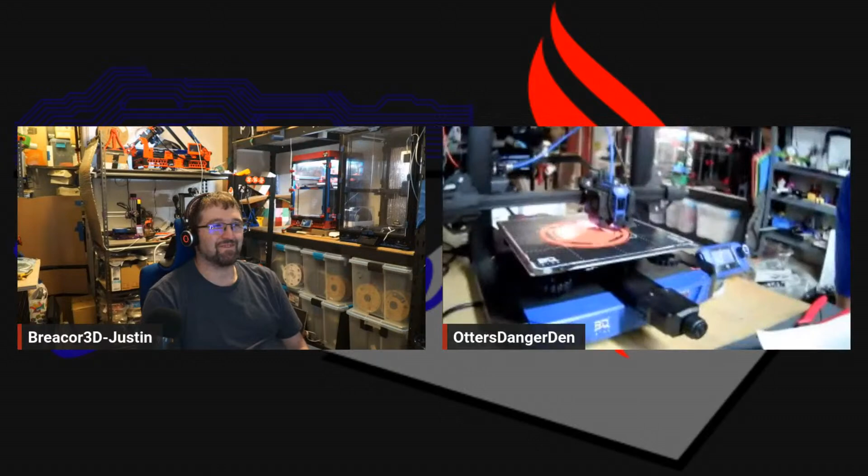Do you, whenever you go live, does it automatically share it with Twitch? Yes. Okay, because instantly when you went live, it came up on my Twitch feed. Yep, Twitch does not let me pre-plan like YouTube does. Oh okay, live with Twitch, you're just live. That's it.

So how's everyone doing this week? Tired, hot, and I feel like I've been robbed. Anybody else? Yeah, I'm more feeling like I'm robbed of time, but that's more than that.

What sort of robbed? That's kind of a worrying thing to say. Well, the last 2 days, Sunday night or Monday morning, whatever, 12 o'clock midnight, I was sound asleep, and I started getting phone calls from the fraud department at one of my primary banks.

Oh geez, uh-oh. Yeah, I told you about this, Justin, didn't I? I think so. So somebody started hitting my account with these 90-cent charges, less than a dollar. By the time I actually woke up in the morning, because I'm not answering anything at 12:30 at night, it's just not going to happen. One, I'm not awake enough to have a coherent conversation, and two, if somebody's trying to scam me at 12:30, they're probably going to get away with it. So I just ignore everything. So I waited till my bank, where this fraud department alert was coming from, which doesn't open up till 8:30 in the morning.

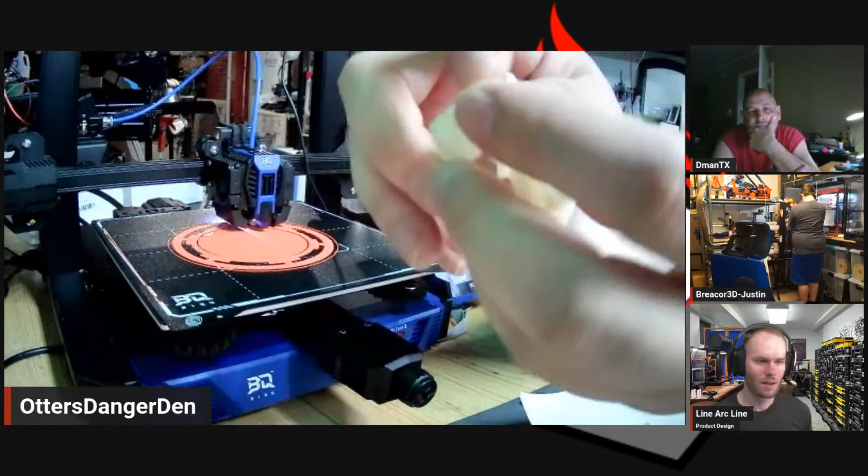Voron. It's basically kind of like the hinge on a bathroom stall door - you open it up and it'll stay open, and when you close it, it stays shut. That's the idea. It just kind of does that with the extra weight on it. You close it and it pretty much stays closed, and it's a little aggressive if you push down on the door. That's how far forward the ramp is, but that's what you need to keep it closed.

That's the idea of having these set states for the door, either fully open or fully closed. That's attractive, what a good idea. And it doesn't go fully open, so if you have machines next to it. When it's fully open, does it lock in? Yeah, it does the same thing - it kind of holds itself open.

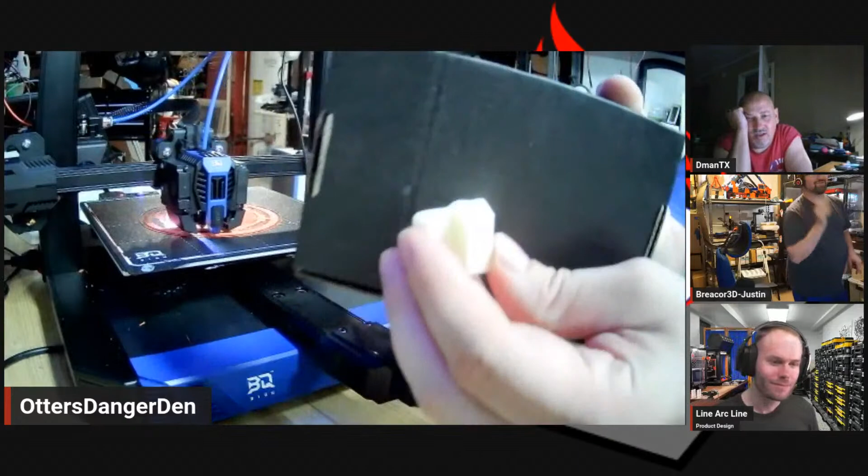So is it done with a notch or is it just done with flat spots? I have the worst filament here for trying to show this off, and I have the whitest hands. Hold on, let me find something a little darker. There you go, Justin, thank you. That was not me, that's my producer. Oh, thank you producer, that's what we call him.

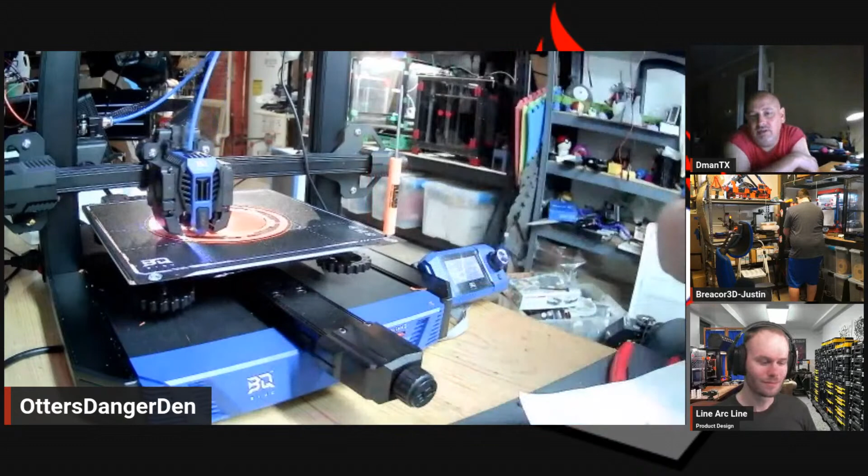Oh okay, I see how it works. Yeah, so I guess you could probably see it a little better on that. It's kind of similar. There you go, okay. Did you design this? Yeah. Post that, I want to print it and check it out. Yeah, I need to do a little more testing before I fully release it, because this was my last prototype.

It was using the 3M adhesive, and it kept falling off when it heated up. So I am putting holes in it instead. Right on, yeah.

It's a good look. Thanks, Will, for bringing his hinge back up. I felt kind of bad, I kind of took over there. Nah, I just get really excited about hinges. You know me.

Yeah, that's something sick about that. I'm sure. Dude, how do you have such a clean fake background? It kills me every time you do this. I have an admission to make to all of our loyal viewers - I am a liar, but a responsible liar. And I'm going to reveal my secret right now.

So this back here is my workshop. It is in reality my actual workshop, and it is not behind me - it is actually in front of me, because my computer is in a different room.

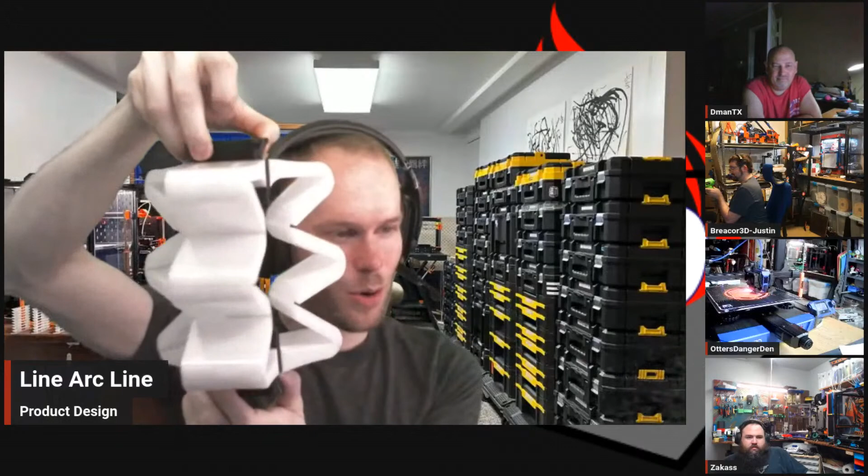Speaking of hinges though, I finished up this fun little flexure mechanism. This is a modification of my bookbind flexure, but in a three-sided orientation, so that it limits its linear motion in one axis. Yeah, I was about to say, it doesn't look like you can get any kind of rotational or translational, you're just going...

You can get a little bit, and that was my discovery from this. You do have some odd motion. Well, I was almost thinking of maybe a three-dimensional mouse. You've got all six axes. The up-down motion, capitalize on that.

Now what did you print this out of? The flexible portions are out of PETG because PLA has in the past been very unreliable for this aspect, but the handles are just straight PLA. I have a bunch of this clear PETG, which, if you can see, is quite a delight to see the gyroid infill through there. It's been neat, and I have a feeling that if I extend these flexure mechanisms outwards, I'll be able to limit the overall motion even more.

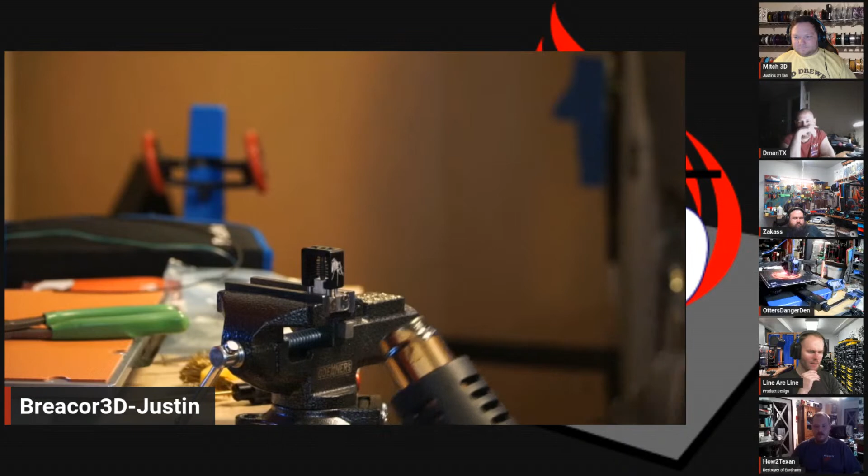I recently got the chance to try nylon filament for a cold pull, and boy, that stuff pulls beautifully. I didn't know, and now I just have a few snips of nylon just at the ready.

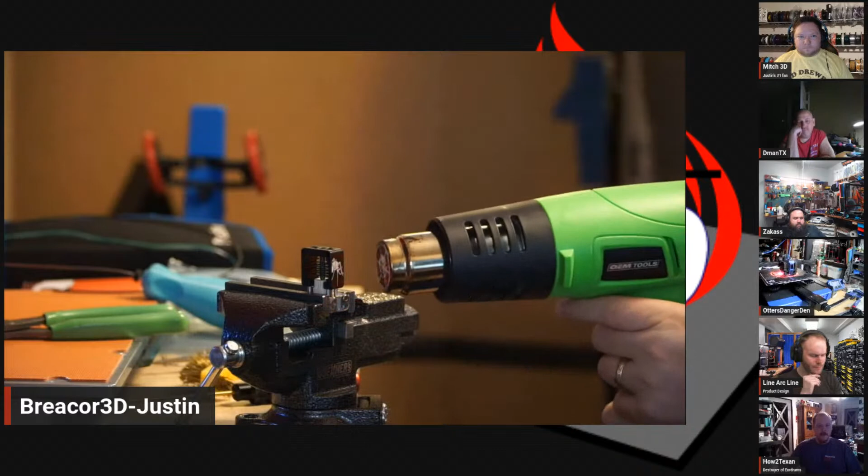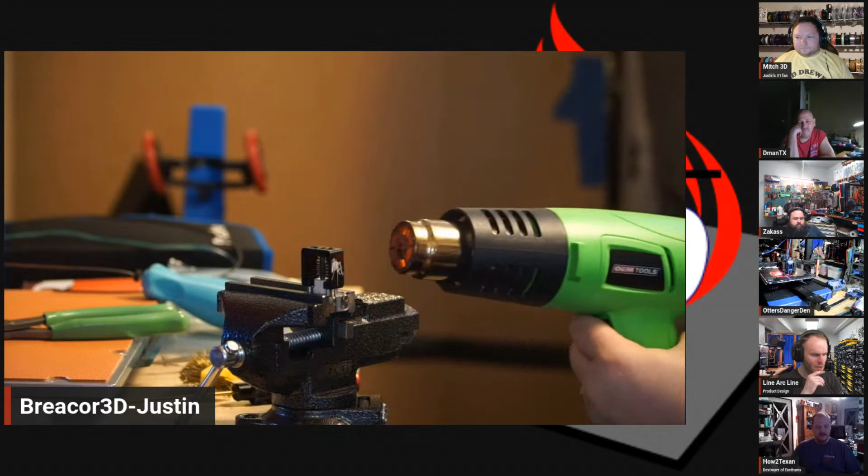So what are we doing? Cleaning out this mosquito hot end, evidently, with cleaning filament, like specialized filament made for cleaning out a hot end. I've heard of that, but honestly didn't bother to look into it at all. What's supposed to make it so special?

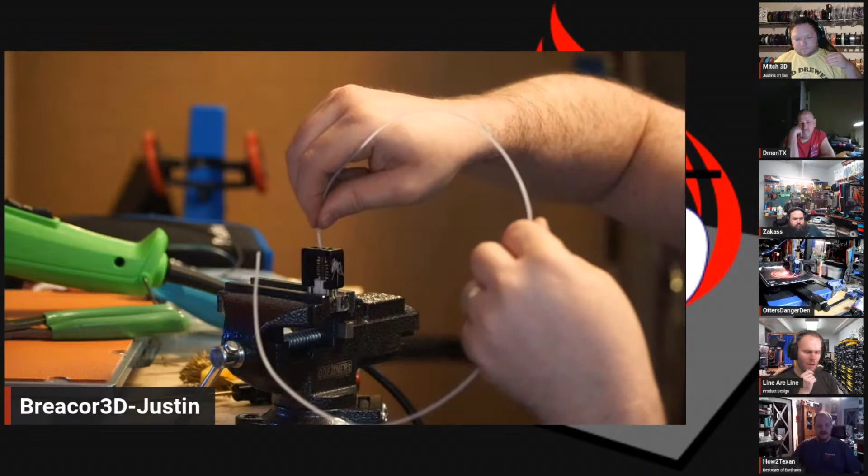That's something I want to ask Justin about once he's finished with the loud heat gun. I don't know specifically, but I've been using it for years and never had an issue with it. So what's it supposed to be doing? It's meant to clean out the inside of the hot end all the way up to the heat break, especially if you have something stuck to the sides of your heat break. It's meant to help clean that out too.

Basically, you heat up the entire hot end and melt it to the edges on the inside, let it cool a bit, shove this through, and it cleans it out. So what, the cleaning filament doesn't melt or something? It does, it still melts. I gotta mute, hold on.

Mic check. You forgot to mute? We can hear you, Mitch. Oh crap, sorry, okay, so sorry, this has been stupid. So I have these Logitech headphones I've had for like 6, 7, 8 years, and I think I played with the cable so much that I messed up the wires or something. They're really thin gauge.

I tried to get the Bluetooth on my AirPods to work, but that didn't work. Then I plugged in my Audio Technica headphones with the mic, but the mic on the headphone jack doesn't accept it as a mic. So I'm using the camera microphone as my headset, which is stupid. Downstairs, my setup has a snowball microphone that works way better, but my desk is a mess and I don't have room for it.

So, your desk is a mess? Oh my goodness. I'd show you mine, but I'm pretty sure I've got confidential information strewn on it. I'd show you mine, but that's why I have a fake background. Yeah, that's the way to go. Oh, yours looks so real.

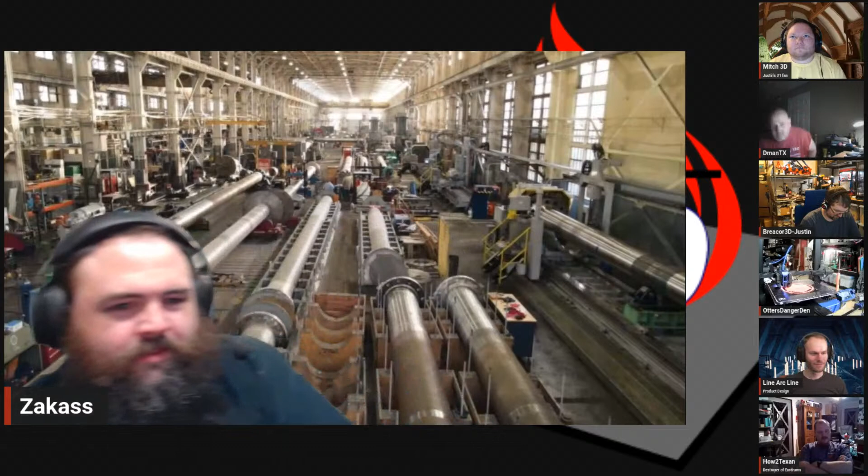Here we go, oh here's a cool picture. Maybe. So this is - I never actually went to this facility. The last place I worked, this was their second shop in South Carolina.

You see that? Lovely. Yeah, I do. These are shafts that go in aircraft carriers and submarines.

Nice, that's incredible. What's this large black panel in the lower left? Maybe lower right for you. It looks like just a welding screen. Oh cool. So on the right, you see the shaft that's the furthest on the right.

That's a CNC lathe that's got like, probably, 150 foot, 200 foot long bed, with like a 72-inch chuck. Hey Zach, is all that out of 4140?

I'm not sure what material it is. Go through some carbide there. Probably, yeah. Man, I was watching this video yesterday about removing a broken tap out of this $1 million part. It's a nightmare for sure.

And the size of this part, I couldn't imagine a lathe that this part would fit onto. And now I've seen the lathe that part probably fit on. Wow, a little culture shock for you. Yeah, that's funny. There were some huge machines that company had, like ridiculous.

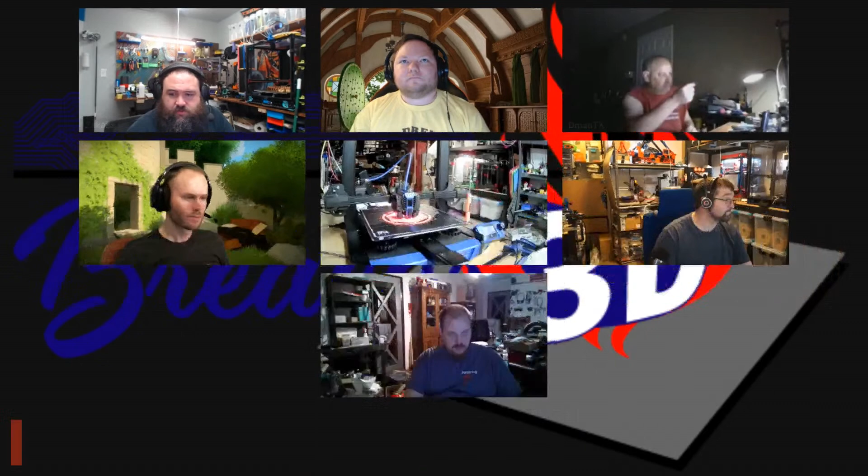Yeah, there's also a former race car company, Relativity Space. No, not Rocket Lab, Relativity Space. Their rocket by weight was 85% 3D printed.

There's a company doing 3D printing with metal - a former NASCAR team, I think it's Hendrick. There's a NYC CNC video where they did a tour of their facility, and that was pretty neat to see, them actually doing production parts and stuff.

I just need a small investment of $1 million and I'll start one. Pocket change, right? Should be easy. I'll start a mobile app to get YouTubers to sponsor YouTubers, get a bunch of people addicted to it. Or just start a YouTube channel, get to a million subscribers, convince every one of them to give you just $1, and you're in business. Easy, right? Or do a Kickstarter - I'm sure there's enough crazy people out there that would back it.

Oh, outstanding, look at that. Nice, Zach. Did you wait for us to pop that off the board? Just finished it. Congrats.

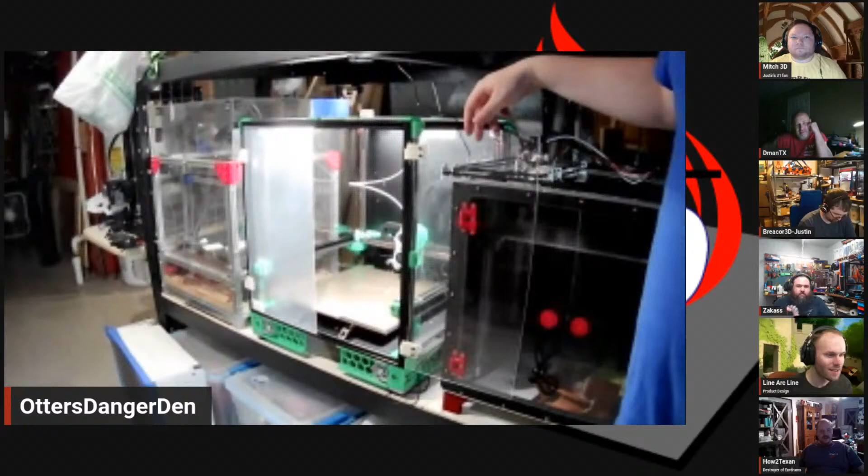So I don't know if you can see this - the hinges, and they stay open. I've had one of these, it was Justin that was building the Trident. I think everybody has a 2.4 at some point. You also don't have the magnets to hold it closed, it's entirely the hinges. That's very interesting - thanks for showing us that. I still gotta print the magnet part for it and put it on there, that'll just be that extra thing. But yeah, that's great.

I have a question about your camera angle right now - it looks like you have one of those screwdrivers, like the promotional tool truck ones. Is that just stuck on magnetically? Yeah, there's a magnet on the end. Oh, that's clever. Yeah, that's from KB3D. I've got a couple of those around. I do too.

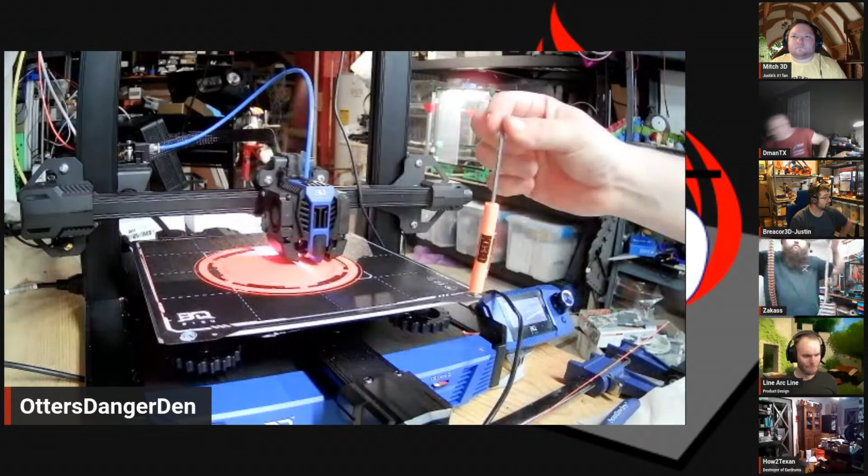It's a 2.5 millimeter hex drive, super useful. I use these screwdrivers so much - this is like the perfect size for the control board screws and everything.

Oh my gosh, that's a very long snake. Keep in mind I'm 6'3". It's wonderful that it holds up under its own weight - this is about 7 foot long. What was that printed on? A 2.4 350, I need to print one of those. It's tricolor silk. Oh wow, very nice.

I think I'm gonna build around with that 350 tricolor. I'll print you the parts, Mitch. The V0 will take a decade to print - that would be funny though. Well, I have two of them now, actually. It would take me half the time, like 5 years. Or you just talk to me, the biggest issue is the $1,000 of parts that I gotta buy.

Yeah, just do a Trident kit. Or you can do a 350 Trident now on AliExpress. Is that not recommended? LDO doesn't offer one yet, so - I meant if I self-source, that's what I'm saying. Self-sourcing is going to run you $2,000 by the time you're done. Is it just Siboor, or because of Amazon parts? In general, when you don't get them in a kit, they're more expensive. Siboor has a 350 local maker kit, it's $1,100 I think. Yeah, that's why I was looking at it. What's funny is, he said LDO doesn't have the 350, well Siboor doesn't have the 250. I think it's a conspiracy.

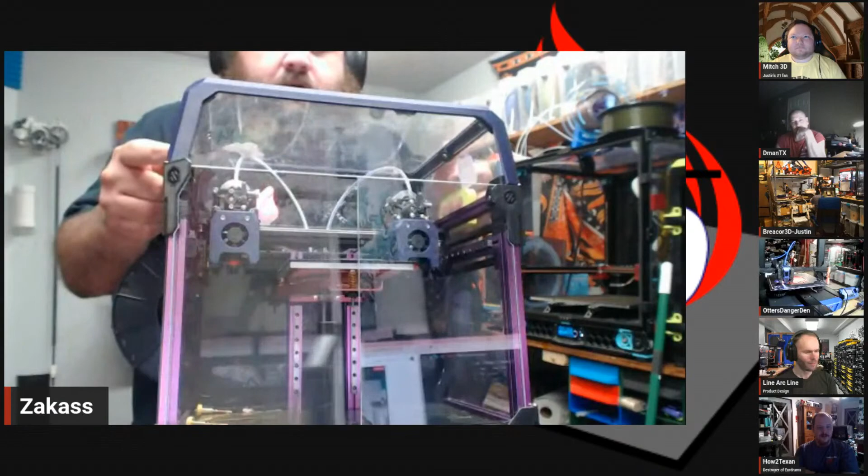You were thinking about selling that? Yeah, how much you want for it? I don't know, I think that's at least 1,000. I can't imagine, that's a lot of work. After the stream, that's pretty cool. Well, if you're interested, make me an offer.

Revos in both heads. Oh wow, they come with a full set of Revo nozzles for both heads. Wow, what a treat, that'd be a nice machine for that size.

So is the top hat one piece? The extended top hat instead of the normal - the original designers glued it together, I just put everything into one, so it's a one-piece top hat. That's pretty slick, so I saw the dual heads in there. I haven't come across that design before, I think I'm behind most of the folks here. Does it have a tool switcher, or are they both independently driven?

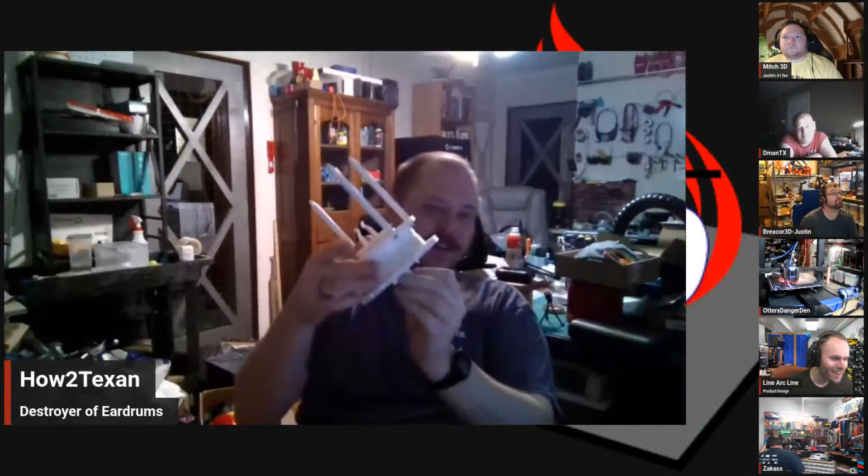I saw How2Texan showing something off that I'm very curious about. What is this? Guess what I'm making. Let me guess, because this seems like a very difficult thing to guess. It looks like a cross between some sort of generator and a birthday cake.

So what I'm holding in my hand is part of a build with over 100 printed parts, and you're only looking at about seven of them. I like Kit Skyfire's guess, which is a complicated egg beater.

It's a sock knitting machine, isn't it? Local maker may have gotten it. What did he guess? A sock knitter. I can definitely see where you might get that, but no, it's not that either.

I'll give you a hint to help narrow down the category a little. It has to deal with mathematics. Ooh, okay, is it an Antikythera mechanism? No. A little more recent than that. Enigma machine?

Is it a physical calculator? You're building one? That's fantastic, those are so incredible. Someone released a model for it. I knew what he was building so I couldn't just spit it out, but I was happy to hear all the guesses. They were insane.

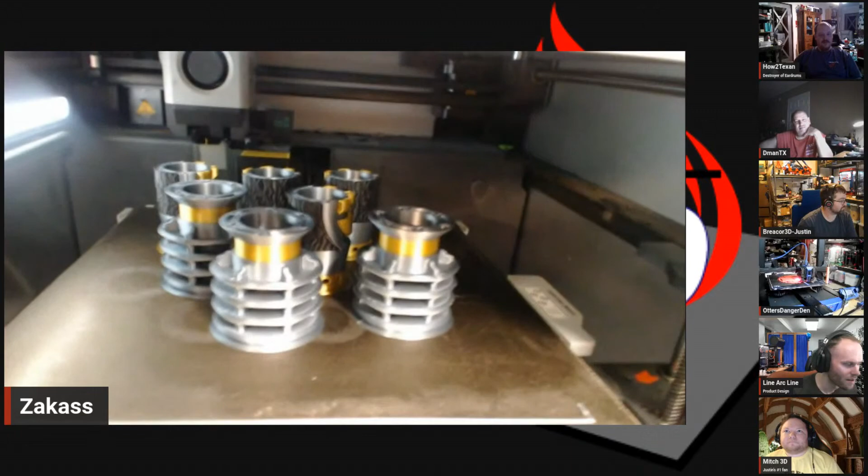Is Zakass printing something similar? No, I got on 3D Printing World's Patreon as well. These are his replaceable blade lightsabers. Wow, so pretty, that's clutch.

Leia and Mace Windu were the two designs there, and I'll show you the color I've got for the Mace Windu lightsaber. It's Polymaker Metallic Magenta. Oh, it's gonna look cool.

Hey, How2Texan, while he's showing us this filament, would you mind bringing up the page that shows the completed project for the calculator? I'd be curious to see that. I could open it if you have it, I keep having to recognize it, but I can reference it.

Guys, I'm gonna bounce out, man. I gotta get out to the garden, I got stuff to do, but I'm gonna see you guys later.

Mitch, are you there? I haven't heard you actually speak yet. You good to go? Yeah, okay, that works too.

Work has been really bad lately, so I haven't streamed or done any projects or anything. I'm just playing Zelda right now. It's better now, but I'm always looking for work. St. Louis isn't really the best area for any of that.

But I'm not moving. Come out to Virginia. Yeah, I'll have to ask my mom. I think it's hotter and more humid there. Hey, I'm with you there, not a fan.

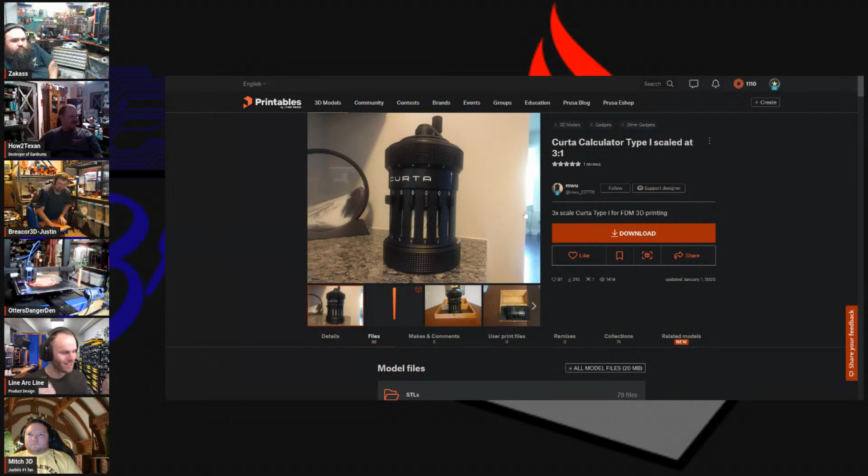Am I going to see you at RMRRF? You are, I'm gonna try and bring my work to a better place so I can present a good representation of my design. Is anybody going to East Coast? I might, I don't know yet. I want to, but I haven't made my decision. Gotta drive. East Coast is easy for me, it's like 2.5 to 5 hours depending on traffic. I would like to, but I just can't. Yeah, you can't, that's for sure.

When is it again, is it later this year? September 30th and October 1st. Okay, if you do decide you want to go Will, we can talk about travel. Maybe, probably not. I gotta - oh boy, my life is in a different place right now.

Maybe another year. ERRF is a little different, man, it's got real big show, trade show vibes. Really? It's vendor heavy, more trade show than Rocky Mountain. That's very interesting, probably because it's more, I don't want to say organized, controlled - more controlled due to where the physical location actually is. It's like the basketball gym of a Christian college, a smaller Christian college, so it's a smaller space. It's very vendor heavy, I mean there's really cool stuff there. That was the first place I think I saw the 5-axis Prusa. So there's really some cool stuff there, but it's much smaller.

I need it to be a cohesive color scheme. Oh man, hold on, did you see my prototype filament buffer design here? Oh God, choose a color! It is cohesively incohesive. Yeah, I mean that is a look for 3D printed objects. It was using up my filament roll ends, but yeah, then the problem continues. Look at all that nice red and black.

Oh, it's the skirt, the skirt's a different color. I hate to tell you, I know you probably haven't noticed yet, but the skirt's a different color. Right, Will, check this out, you're going to love this. Ready? Is that sarcastic? I'm going to love this. See it on the right? Oh gosh, let me redeem myself.

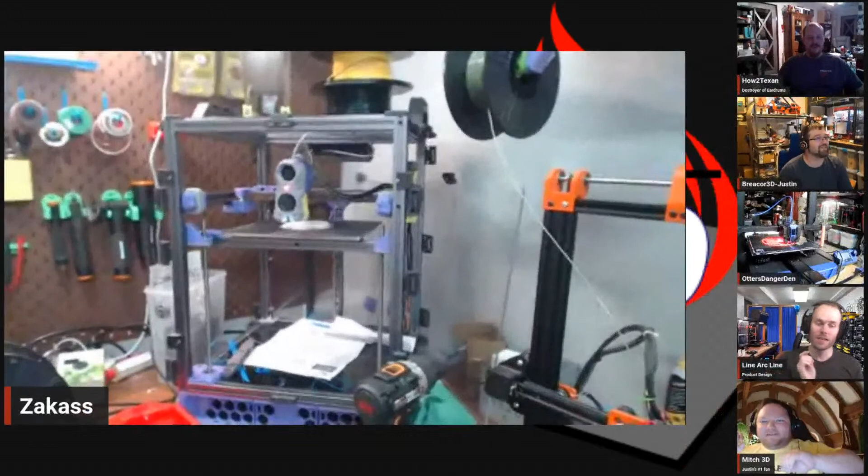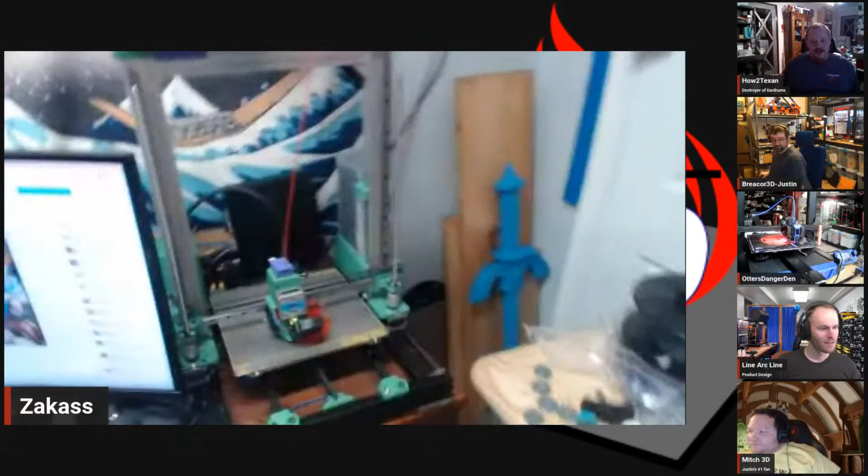To be fair, that was a cohesive color scheme. When you're talking about the realm of color schemes, there are palettes that I like. I like the gray and purple, that's pastel. My color scheme, black vaporwave bottom, silver on top. The only way this boat's going to wind up a cohesive color is if Nick jumps in and says, 'Hey, I really like this idea, let me send you 50 spools of identical material.'

Here's my question: if you all were restricted to one color and material for the rest of prints, what would it be? Purple ASA. Why ASA? Because it's better than ABS for most things. Why not PETG though? Because it's brittle. Well, I'm using PETG for my CNC machine because it's stiffer than ABS. You really should be using PLA for that, but I don't, the temperature is a problem.

Yeah, but also just purple because everything I have is purple. I have like a dozen purple filaments. There's literally nothing purple on your screen right now. Well, I'm pretty partial to purple myself. You look like you have more of a beautifully carved wood aesthetic in your lovely home. Yeah, it's all Pantone colors. No, this is actually, I would love to live in a place like this.

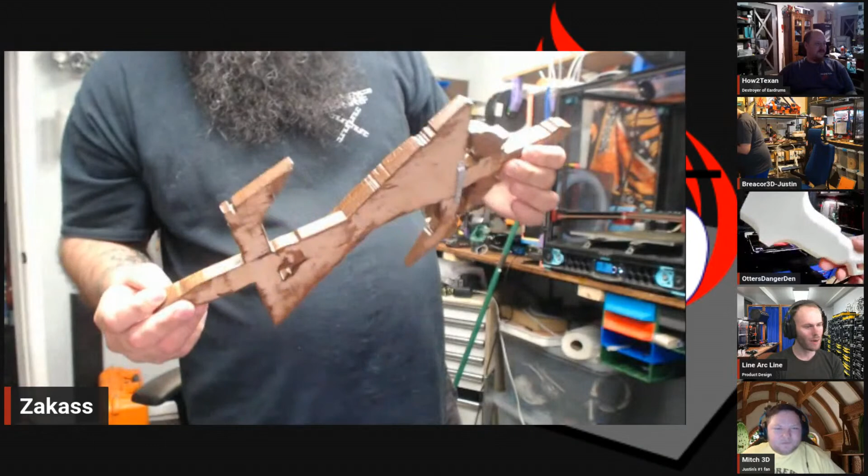I'd like to even own a home, that would be nice too. But other than that, talk about color, purple is a little too much. That's really cool, wait, you made that? Yeah. Is that wood or fake wood? It's red oak. Did you CNC it? Yep. Out of what machine? ShopBot PRS Alpha. I've heard good things about the ShopBot. Yeah, this was back when I worked for the Army.

Oh man, if I could, I would sell those like hardcore on Etsy right now. But my CNC is like that close. Well, that and tooling and programming. But Will, you're really going to get a kick out of this, you will never in a million years guess how this was designed.

Was it SketchUp? Tinkercad? Photoshop? Did they have a 3D tool? It wasn't using Photoshop's 3D tools either. What I did was take a grayscale SVG image and did a manual grayscale height map. I brought it into Aspire, and Aspire is really good with that height map stuff.

That's really clever. I'd honestly consider buying a copy of it, though it's really expensive. It's worth it if you're doing more than hobby stuff though. You can't buy a copy anymore - you buy a yearly license for all their software now, whether it's Aspire, VCarve, or VCarve Pro, depending on which level you buy. But basically it's really good CAM software.

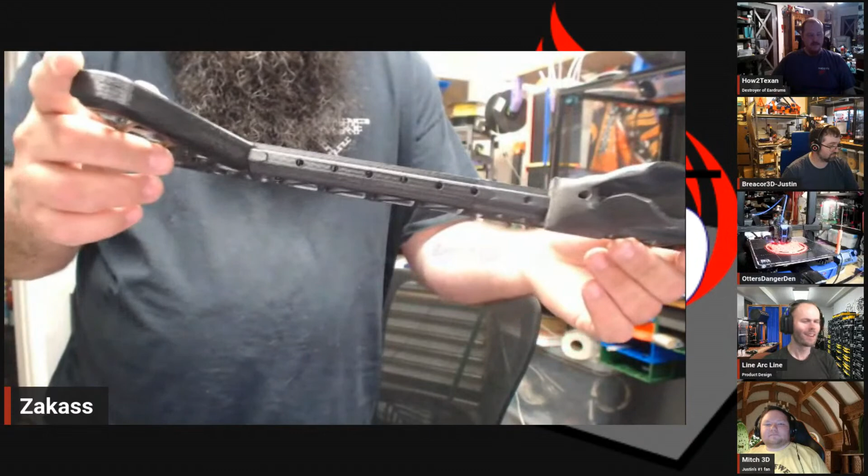So this is my own design that I never published. This was the original, and then I went to this design, which is just as rigid but prints without supports. It uses heat sets instead of trying to clamp, and it's dovetailed together with one pin on one side and two on the other side.

So which headset or controllers is this designed for? Those are Quest I think. If you get these cups and modify it to fit the rail, it can work with anything since it's a modular system. That's a cool design, fantastic.

This was like 2019. I printed one of the ones that was online and it would work great, but then it would just disintegrate because the way it was attached together sucked. So I designed this myself. I need to find the files for it and publish them.

I bought an HTC Vive and was using it every day, loved it, especially some Beat Saber. I actually had a top 100 score out of the whole world at one point. I don't remember what song it was, but I had a top 100 spot for a while, and I was in the top 1,000 on a lot of songs.

But I packed up my setup and took it to a party, and I let a whole bunch of people play it. Everything was working fine all through the party, and after the party was over it was still working. I packed it all away, brought it home, set it up again, and I could never get it to work again.

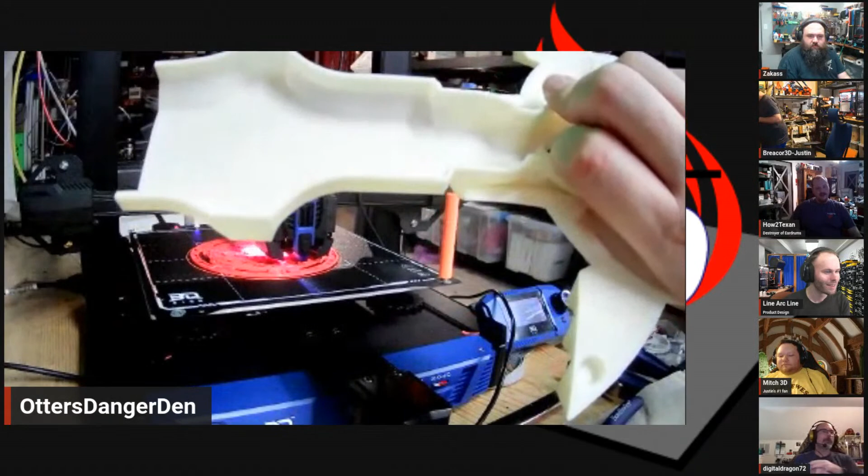So Zach, this is a project I'm working on right now. It's gonna be a light. That's cool. Yeah, I'm working on figuring out the diffusion of it.

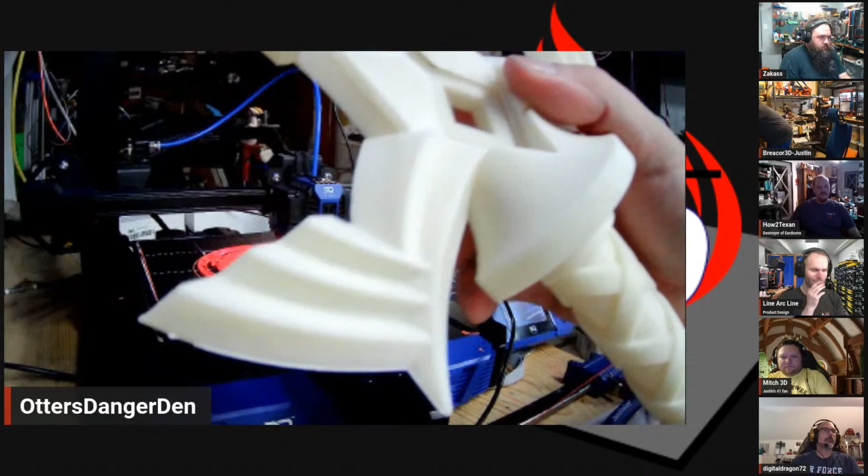Is that from Zelda? So you know how the blade glows in the beginning of the game? Kind of like that. So I'm gonna make a blade for the wall that's gonna glow. Yeah, that looks pretty cool.

It would be so cool if you printed the blade part out of glow in the dark filament and put UV lights in it, so that when you turn out the light and kill the UV lights, the blade is just glowing on the wall in the dark. That would be awesome. I swear, are you going over to your wall to pull out something about what I just said? You always do this. Yes, it's very impressive every time.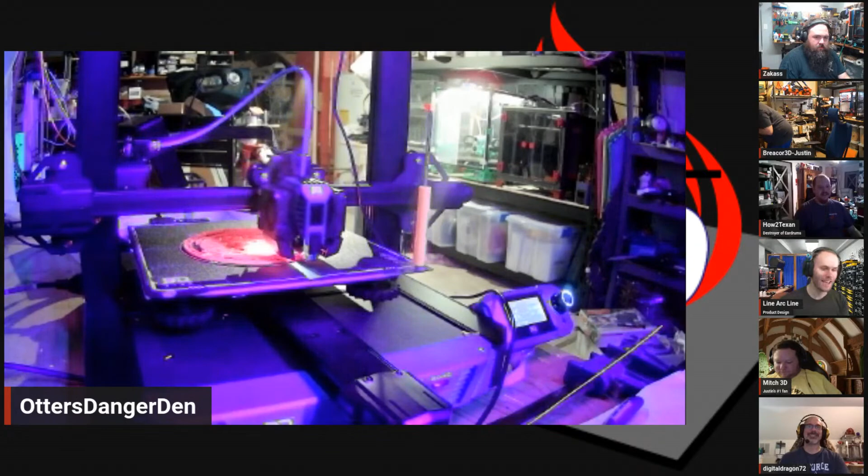So you see how this is white? All right, I'm gonna switch over to some black lights here, some UV light that you just happen to have lying around, of course. You do this every stream - I mention something and you just go pull it off your shelf.

Admittedly, glow in the dark filament and a UV light isn't that big of a deal, but you always do that. I'll find it, you need to see the color difference. Oh, you're not gonna be able to see it. Dang it! This isn't glow in the dark, but it's a UV change filament. Oh I see, it changes color in UV.

I'm moderately sure that the UV reactive filament has some glow in the dark particulate in it, because I got some very similar UV reactive filament back in the day and printed a little stand for something on the wall. It was very distracting because it glowed about as much as those glow in the dark stars you put on your ceiling as a kid. That was quite the surprise because I was trying to black out all the stuff that was glowing in my room, and I'm like, ah shucks, I made this huge print.

Those stars would just glow forever, it seemed. You know, 3D printed glow in the dark stuff - I wish it glowed even 10% as long as those stars seemed to glow. Those things were amazing.

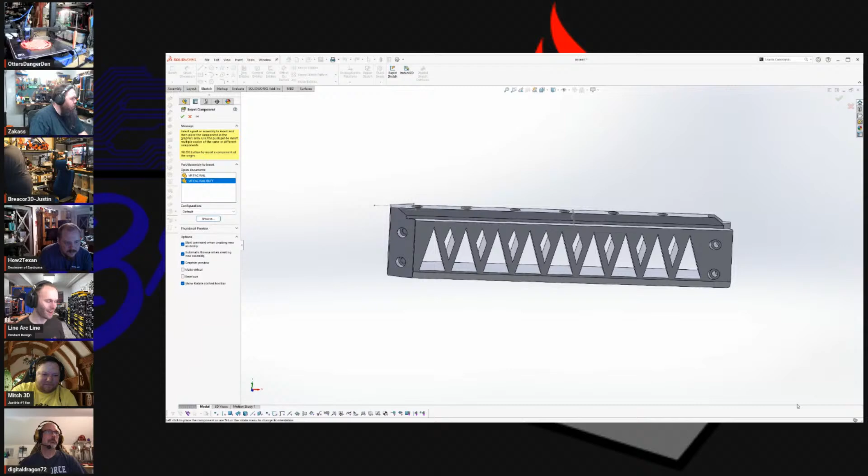The most expensive nozzle I own is a ruby nozzle. Oh, you went for a ruby. Well, I got a good deal on it - it was $30.

And that thing's had no problems - I've run carbon fiber, glow in the dark, wood fill, and just about every other abrasive type through it. I think the only abrasive that comes to mind that I haven't run through it is glass fill. I mean, glass fill has got to be less abrasive than carbon, right? Although I'm not sure.

Okay, bring that back. SolidWorks, Justin, I'm gonna show this to Will real quick. But I was thinking they should have garnet filled PLA so it can be even more abrasive, playing around with the nozzle.

Oh boy, I don't know why my screen's all blown up. Hold on, I'm working on it.

I was thinking, wouldn't it be good if you had solid garnet? The garnet would make it weaker. Those would be just about indestructible, but they're like $100. Yeah, I've been attracted to those tungsten nozzles ever since I heard about them.

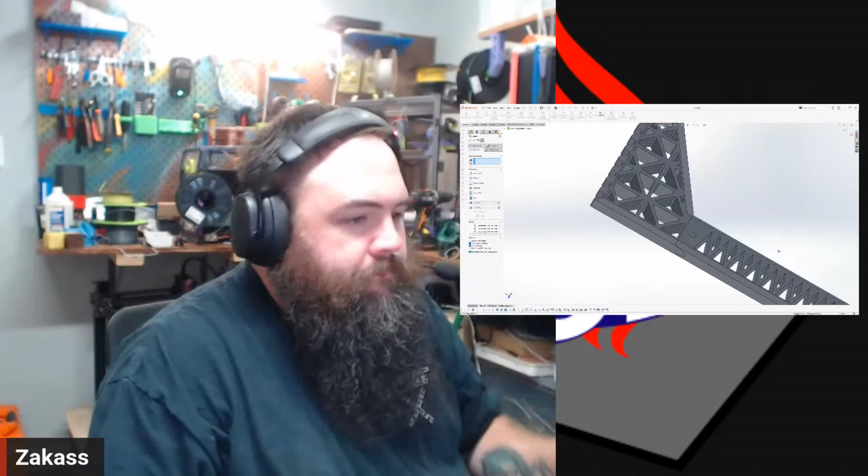I love your chamfer work. I love your consistency. So this is designed to print laying down.

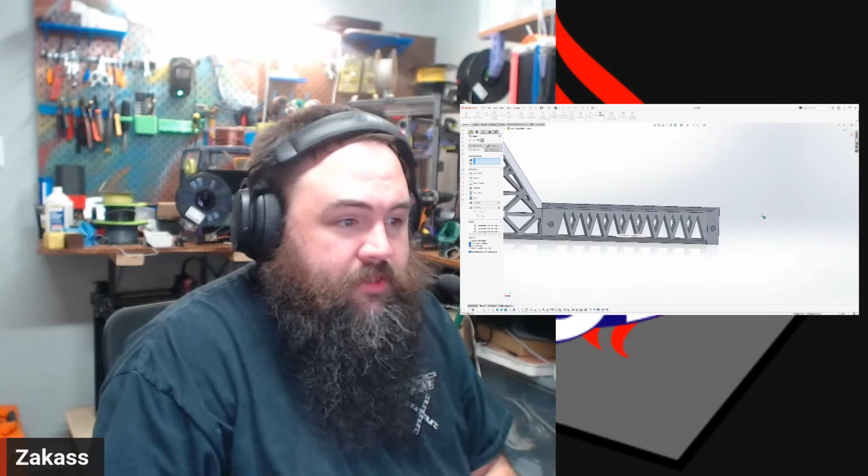That's fine, there's nothing wrong with that. This rail prints best and works best when it's printed in this orientation. So that's why I have the triangles and diamonds. You can print this just like this and not need support.

I like the triangle and diamond patterning that you have on there for the support. I haven't seen something patterned like that before, and the aesthetic is very striking. It brings this feeling of almost an intentional fractal look.

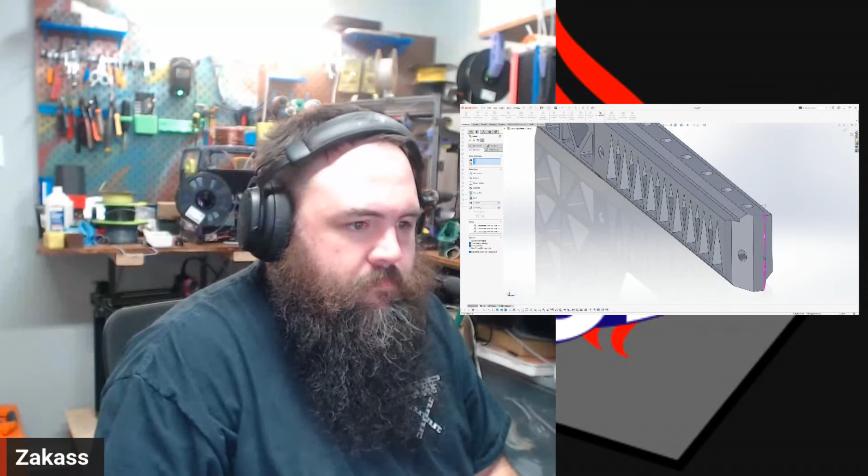It clearly has intention behind it, and people will see that. But it's also an attractive pattern, just visually. So it's got this very alluring look.

So what do you do your design work in? SolidWorks. I'm transitioning from SolidWorks to Onshape. So I'm gonna put this on my printables and upload step files. I'm not doing STLs anymore. Oh, I think that's a good idea. I am protesting STLs. If I ever upload anything from now on, it's always going to be a step.

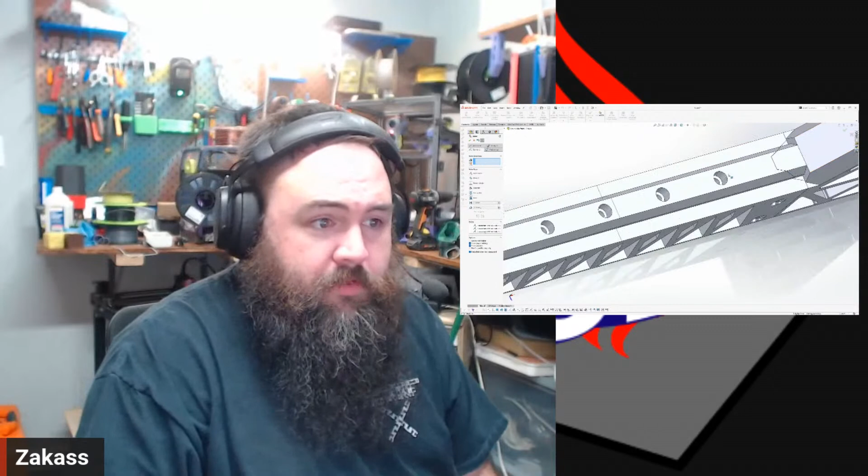Now that we have step import, it's not worth uploading STLs, because it's hard to edit. Step is vastly better. It's also a smaller file, and you get better resolution, so you can determine how faceted you want your part to print. You can edit it much easier.

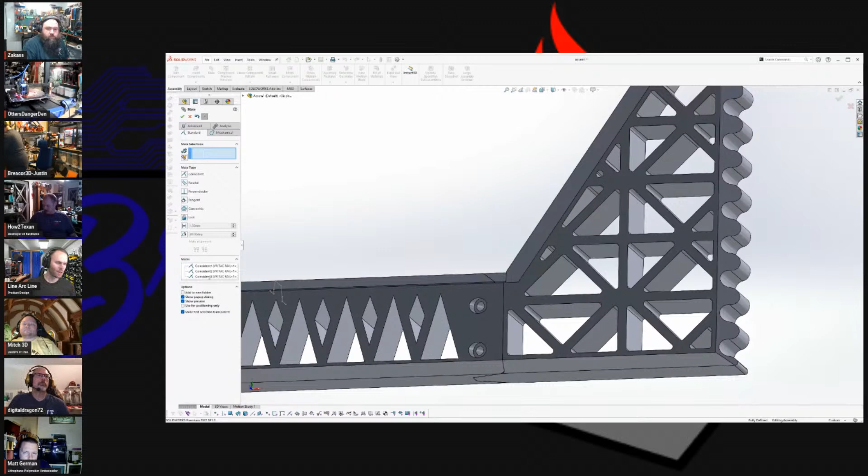So I had a dream with steps where it would also convey the part history, the constraints, the sketches, the full content, the source of the document.

Yeah, I guess. So Siemens NX is absurdly powerful CAD, like crazy powerful. I'm about to give you an example. Let's see, I'm going to stop sharing the screen.

So first things first, I am going to save out as a step. Looks pretty good, huh? That snake is a good look. Yeah, I'm doing one in green right now.

Okay, so I've got the step file. Let's see here, Siemens NX. So NX is what my last job used, we went from Inventor to NX. NX is what General Dynamics Electric Boat and Huntington Ingalls both use for all of their CAD stuff.

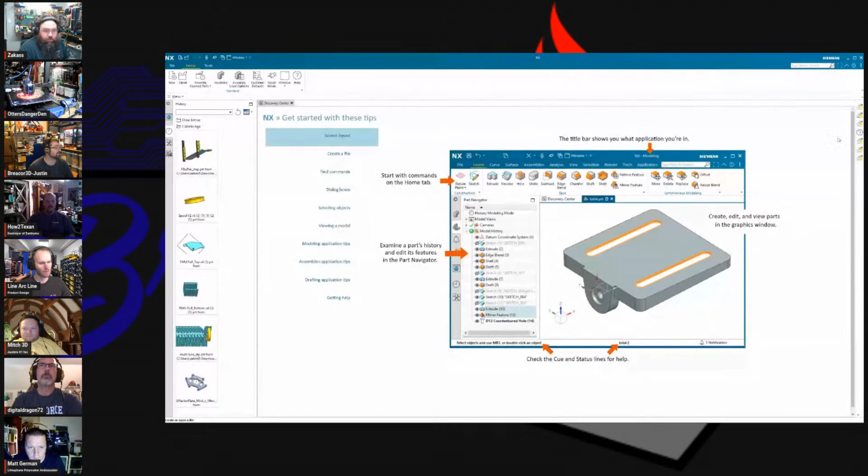So it's a full CAD package. I like the interface, it's a good look, very consistent across everything that you do. Some of the stuff is a little weird, doesn't make sense. If you're used to working in other systems, it can be a bit of a headache.

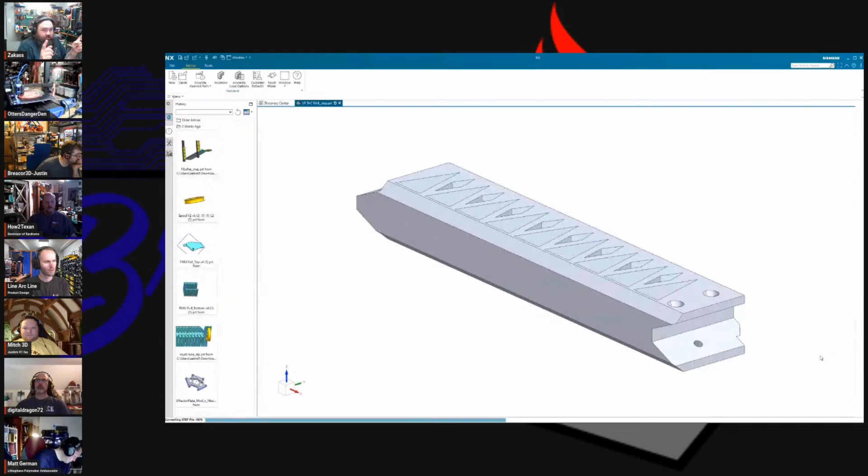Is it the same sort of process, just buttons in different places, or is it a whole new workflow? It's slightly different workflows. Like you don't select dimension and then put a dimension on something. You click two objects in a sketch and then it pops up for a dimension, and you can click that dimension and it'll make it.

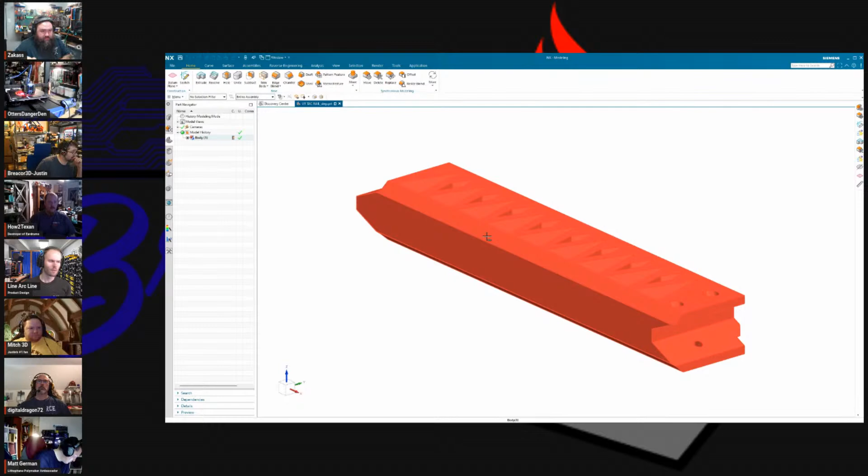And there's also, instead of relations and no relation, there's two different levels of relations. There's inferred relations and persistent relations. And there's a hierarchy system where when you draw something out, it's going to have—I could say this line's concentric with this line—unless I turn on persistent, a dimension can break that relation.

Once you understand how that works, sketching is a lot easier. Before that, it's a nightmare. It's like an intentional over-constraining of a sketch kind of thing.

It's basically you have two levels of constraints. You have soft and firm. Oh, I like that. It has its uses. It's a little weird, okay.

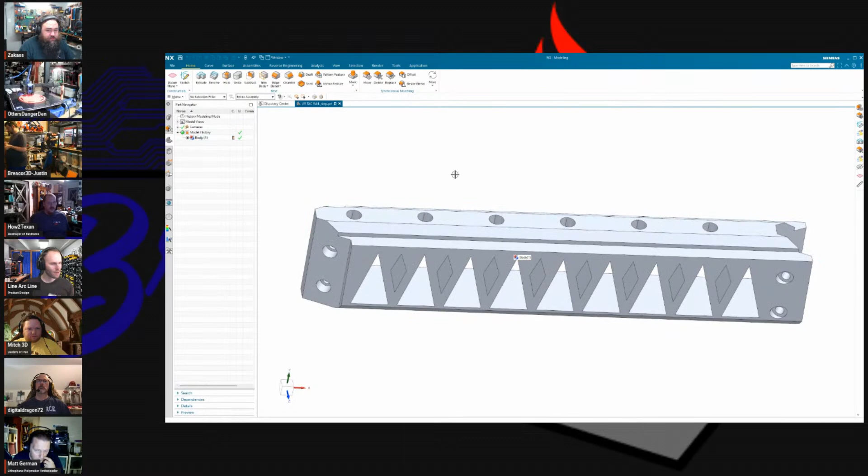Okay, yeah, are you ready? So this is a step file. Are you ready to have your mind just blown out the back of your head? I have high hopes right now. Move.

Oh, are you just gonna move individual elements of it? Like, can you move that screw hole closer? Oh, you're just gonna move all the faces, huh? It's not just the faces. Hold on, let me redo this. I'm gonna go up here.

See, this is why working with step files is better than STLs or any mesh. To do boss or pocket faces, I click in there, and then I click in there, and then give me a vector. Let's do this as a vector. No, wait a minute.

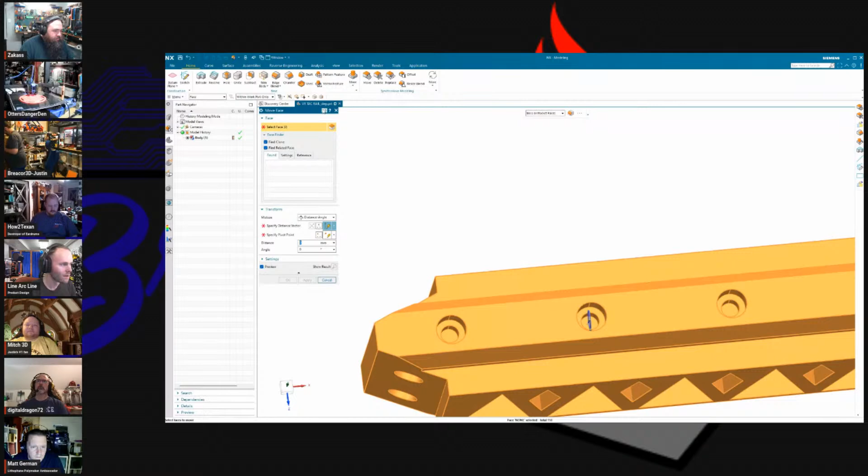You got to be real careful when you're selecting stuff, or you will mess yourself up good. I'd imagine.

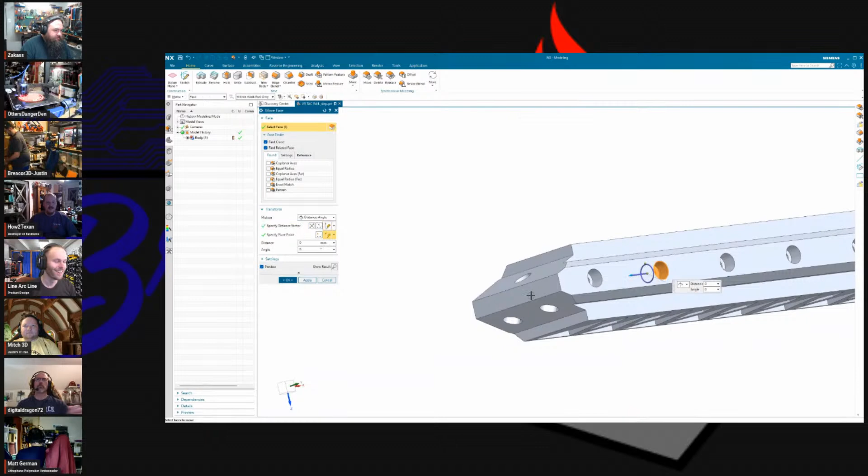There are so many different pieces of design software out there. So I tried to find how much the software you're showing costs, and I got scared because they don't have it listed on their website. They said contact sales, and I'm like, oh man, they gotta have a sales associate convince me that it's worth the price. It's steep. It's very steep.

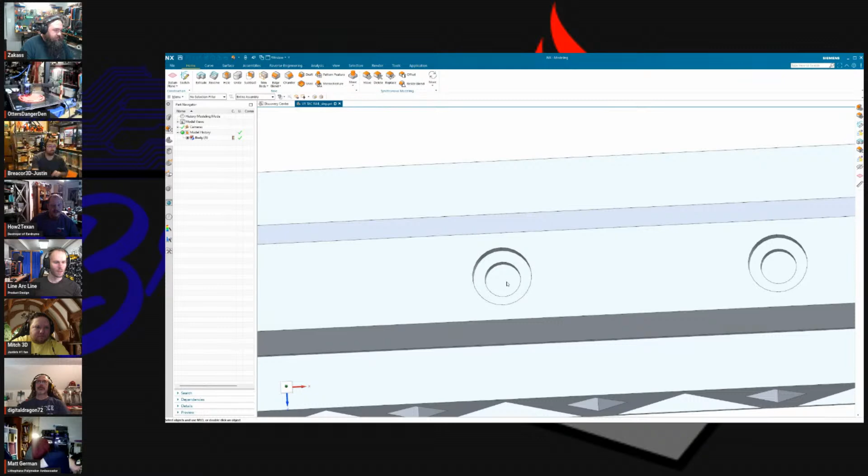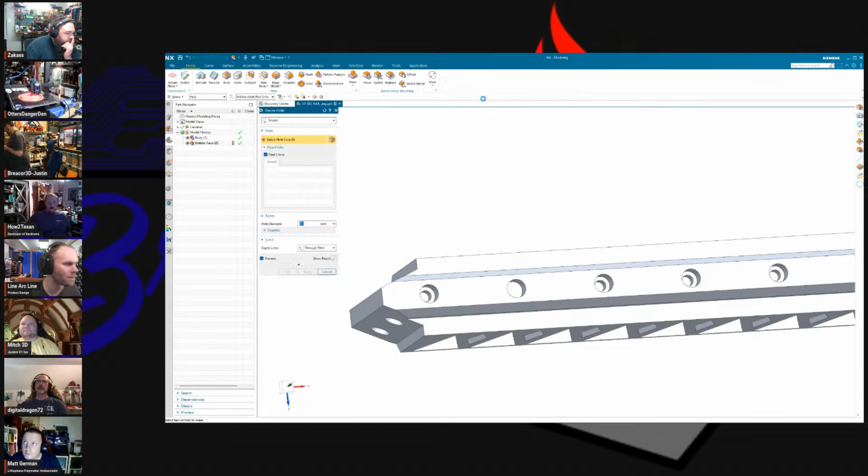What else can I do here? I can resize a hole. Oh man, so hole adjust depth. Effortless with a step file. This is called synchronous modeling.

So move works on faces as well. So I can pick this face and I can push pull it. Wow, yeah, that's a delight.

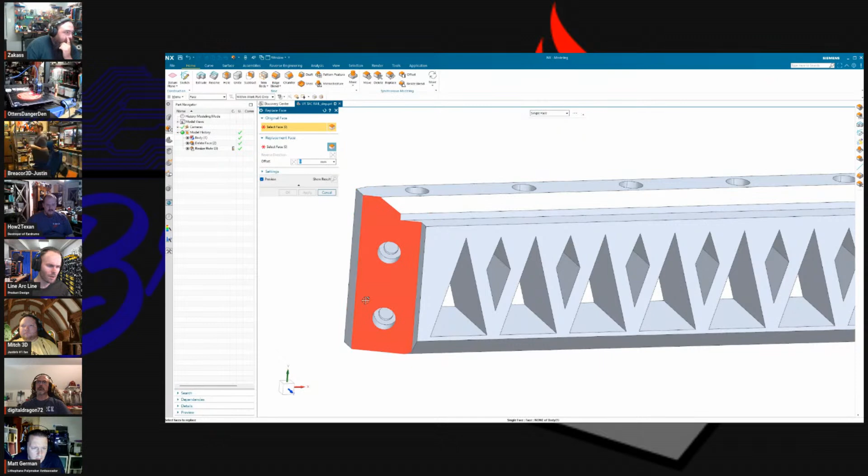You can replace. So if you have a surface, and you draw in another surface, you can replace one surface with another, and it'll heal it up. Wow, okay. So it keeps the... what is a watertight model? A manifold. Yeah, so it keeps a manifold? Yep, wow, that is a real treat.

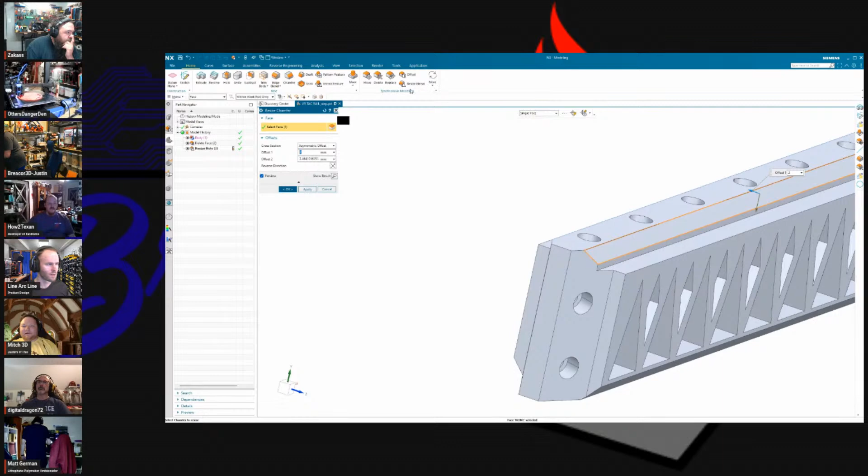Resize chamfer. You know what also was really good was 123D Design. That had a lot of really cool features. I don't know if you can really get any of those anymore.

Edit cross section intersects a face set and a plane, and then modifies the model by modifying section curves. So you can actually change the cross section of a part, and it'll translate it along. Just amazing, amazing power. When you're working with step files, this is the way to go.

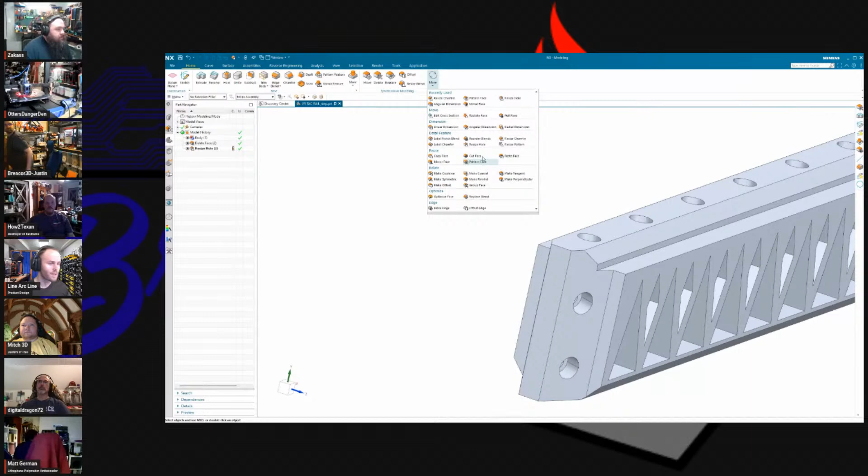I'd like to show you guys something that's completely different than what you might have seen in the past. And I believe I mentioned it last time, but didn't.

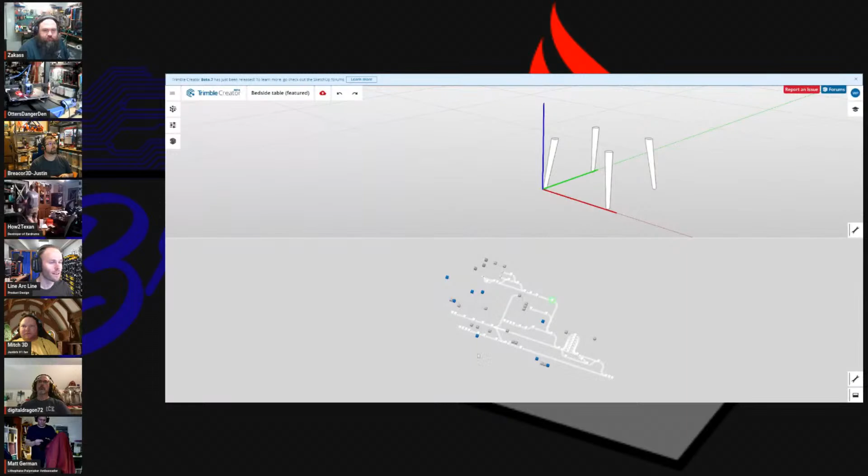Tinkercad's kind of a messy modeler, though. One seat of this software probably costs the development budget of Tinkercad.

All right, this is Trimble Creator, and it's a node-based, oh that's cool, CAD software. And the best thing about it is the parametric interface for changing these files once you make them with this generator. That's cool.

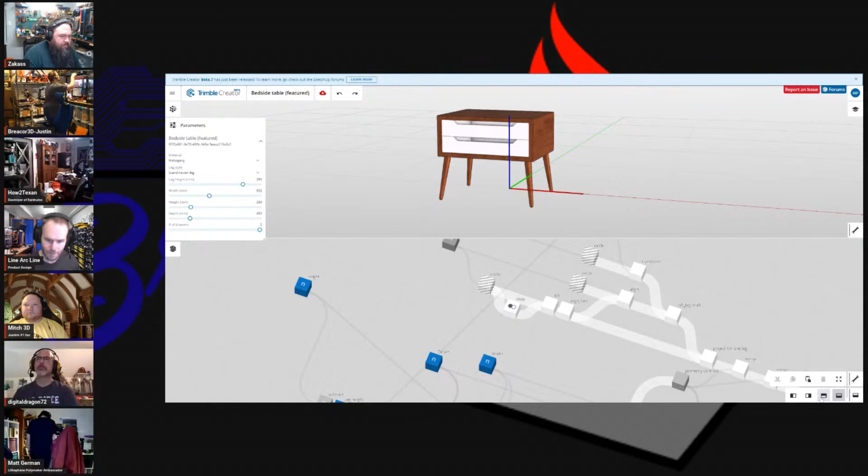And you can see the, let's see if I can change this to pop this way. So it starts with some primitives, and you can select various nodes along these.

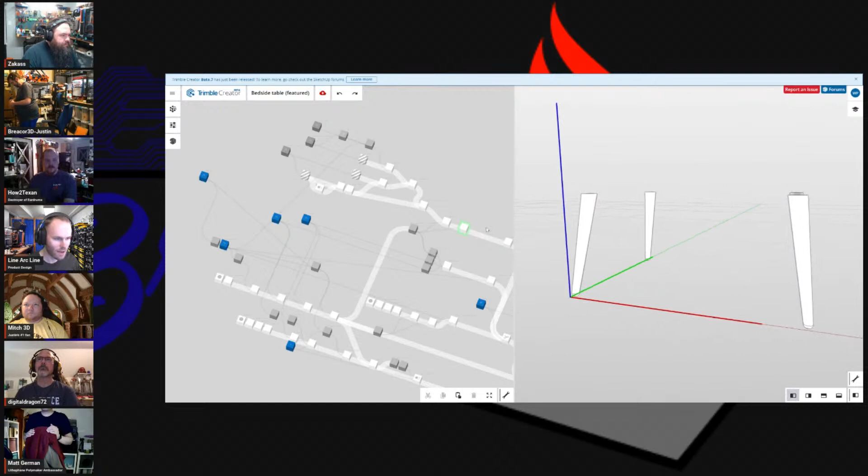You can also organize them in various ways. But as you go down this path of nodes, you can start to see how they are assembled together.

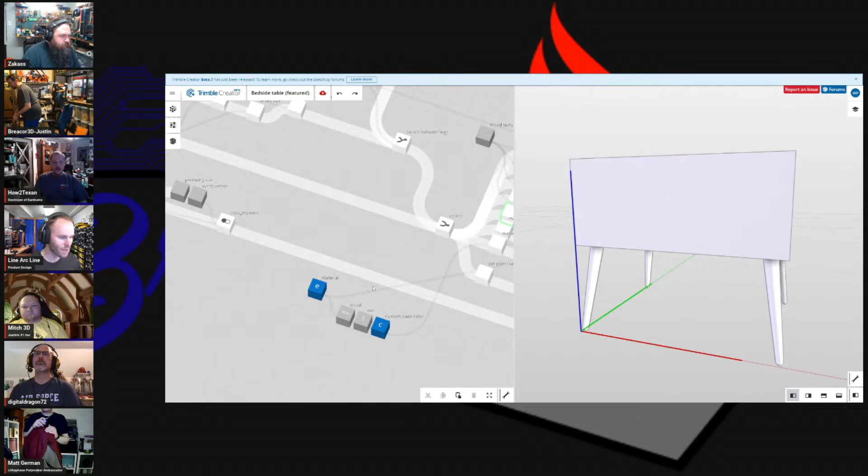For instance, all of the material assignments in this section right here. And I love that they add, if you mouse over any of these connections, they're either geometry connections or data connections. The thick lines are geometry, the thin lines are data. And you can easily break down each piece of this model, and then through the stages, you can arrive at this drastically parametric model that's also very lightweight because it's running on the SketchUp kernel.

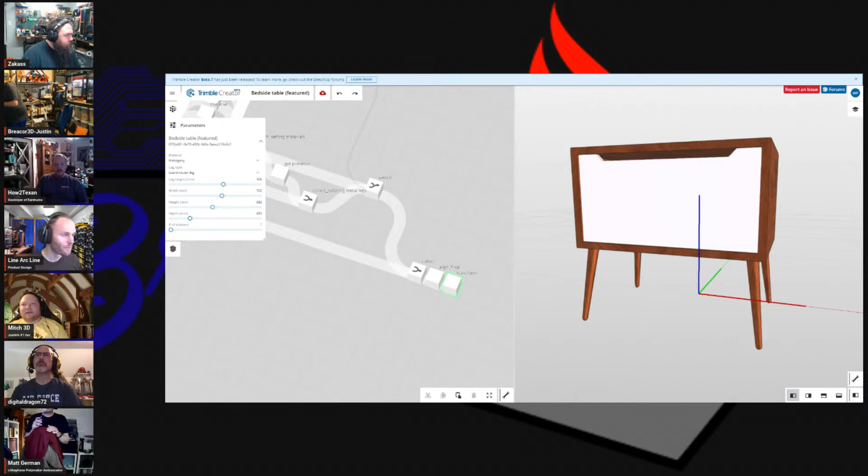Oh my god, that's so cool. That's fascinating. How much is that? That looks expensive too. Free, and it's in beta right now. Like free, or like free as in not commercial free? It's free, just like SketchUp is free, I believe. Oh wow, it is by the same developers as Trimble's SketchUp.

Yeah, and I've been on a call with them, and let's see, what was I?

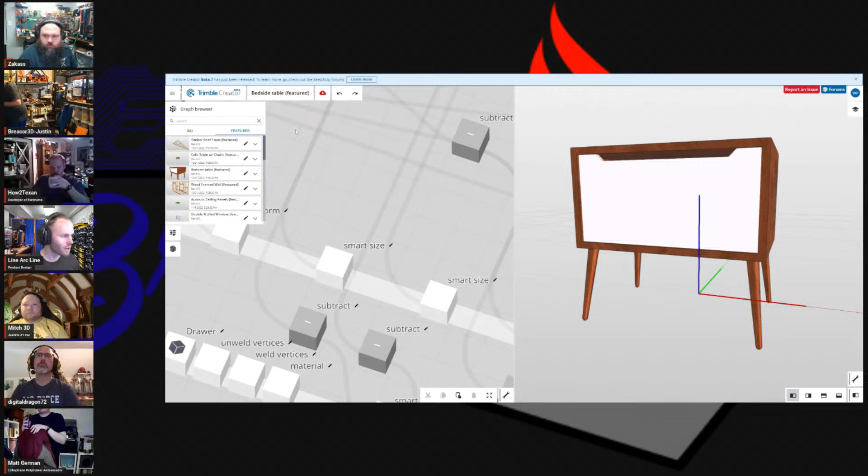We can try and find the thing that I was working on. I don't remember the name of it though, and I can't be asked to have my memory work right now.

They're a real treat to hang out with and work in this wonderful software they've developed. It's such a treat to see another parametric history-based modeling software with a completely different workflow than anything else I've ever seen. So there's no way to drag and drop geometry, right? You have to do it through the nodes, which I prefer. There's a place for working with primitives and drag and dropping primitives too.

Tinkercad is valuable, but I think that for making beautiful models, you need to have a beautiful CAD process. That's also where I want to see 3D modeling go in general, models that you're able to hand to other people, and they can not only use the parameters you've set for them, but also modify these files in a very genuine and thorough way.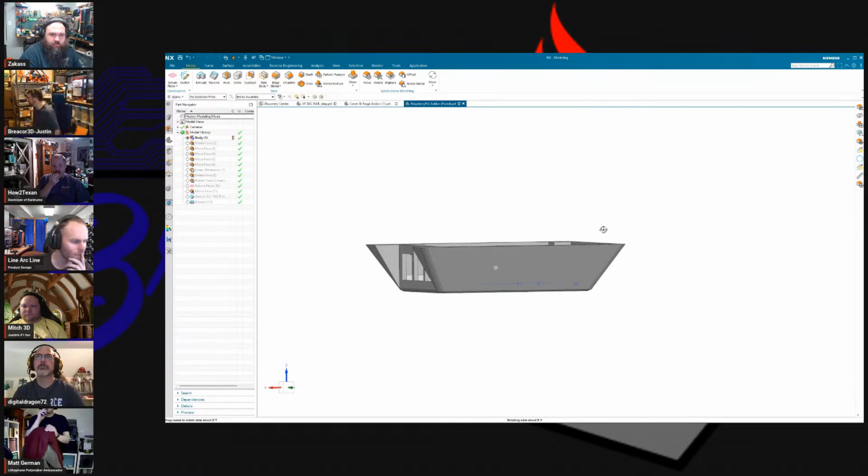I want to show you this. This is a good example of something that I modified using synchronous modeling. This looks like a Raspberry Pi enclosure, a Pi 3B enclosure. I converted it to a Pi 3A enclosure in 10 operations.

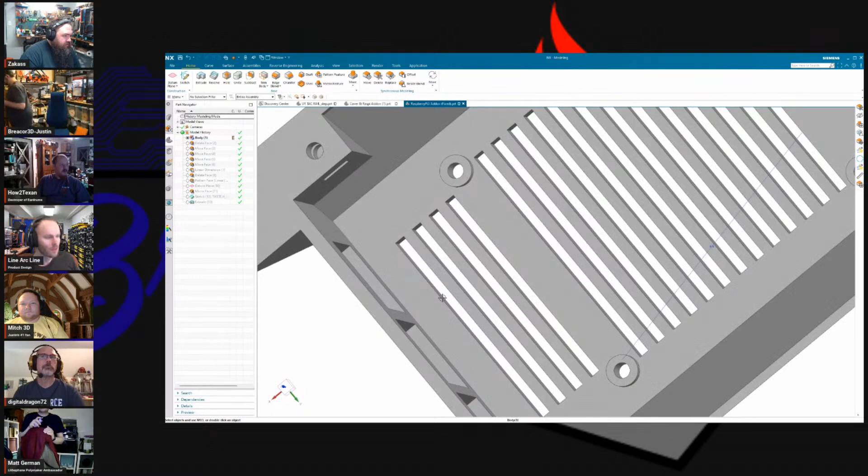So let's see, what face did I delete? I deleted, so you see these slots here, I deleted them, just got rid of them. Then move face, I slide everything back. Move face again, I shift over my USB port. Move face again, bring it down. Move face again, turn that into a slot.

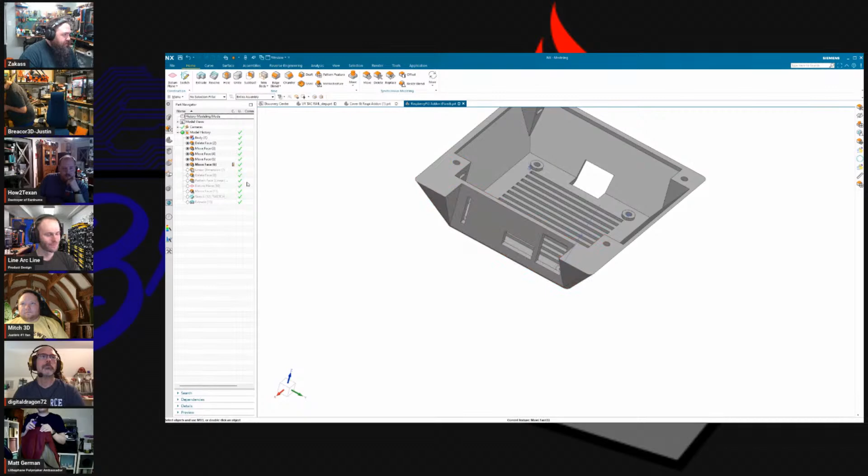Linear dimension, what that is, I put a dimension on the slot height. Oh, you can also add dimension to this. Oh wow, that's great. So there's the distance, and you can select your origin here, and then your measurement, and then the face to move.

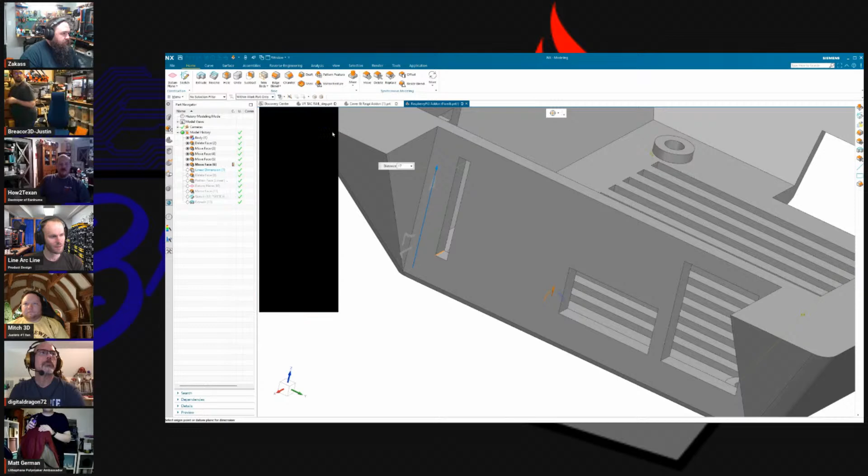There are so many fantastic programs out there. You know what keeps me stuck in Fusion 360 though? Option paralysis.

Sure, so watch this. This is one operation, this is a pattern. Bring that up. You can pattern a previous face, very nice, pattern sets of faces. So there's a plane, and then I mirrored across, but only what I needed, and then sketch in that and extrude cut.

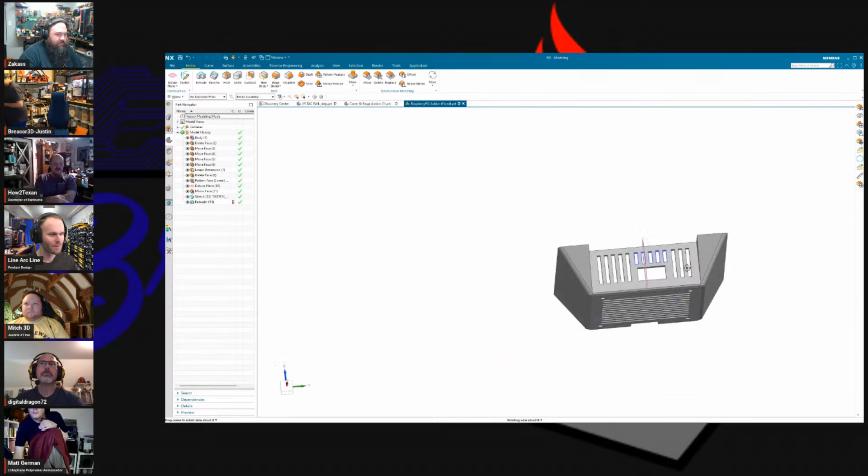Stop showing off a piece of software I can never afford. And now it's a 3A. I think I'd rather just hire Zach to do mods than actually buy software. Oh, and you even pop the little prefab in there, that's great.

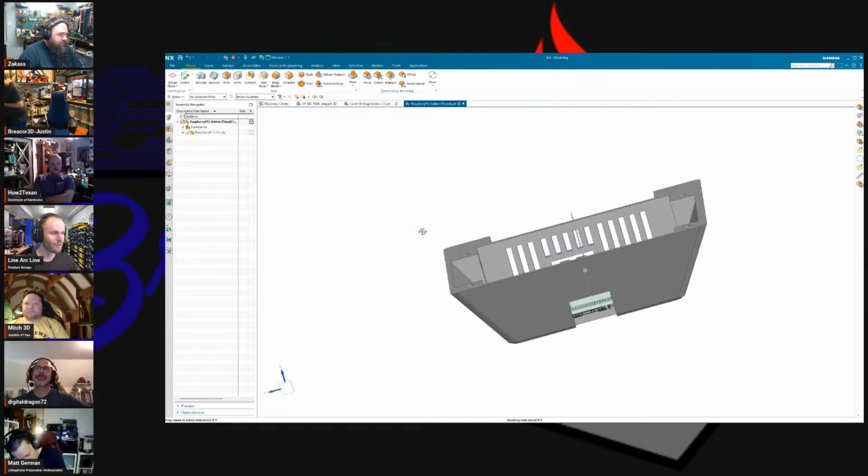I have been keeping track of my notes whenever I try new CAD software. I always take notes on mostly what I hate about it, and sometimes what I like. So far I have documents for Fusion, Onshape, SolidWorks, FreeCAD, and the iPad's Shapr 3D, which was a very short note because I quickly realized it was definitely not for me.

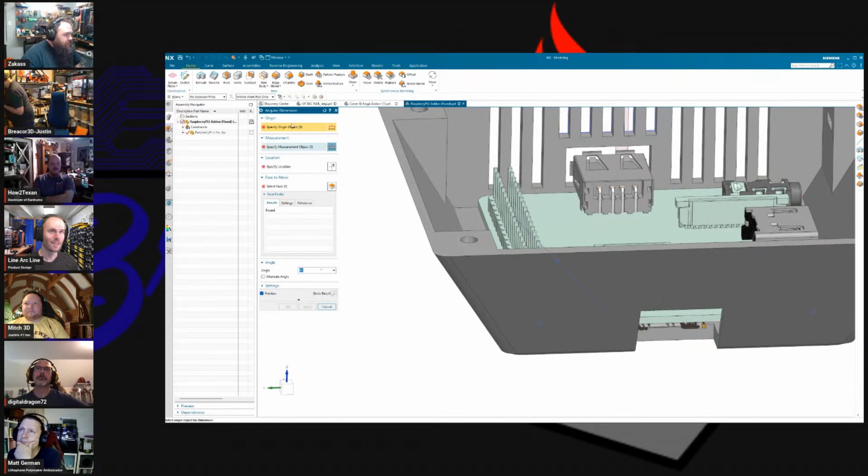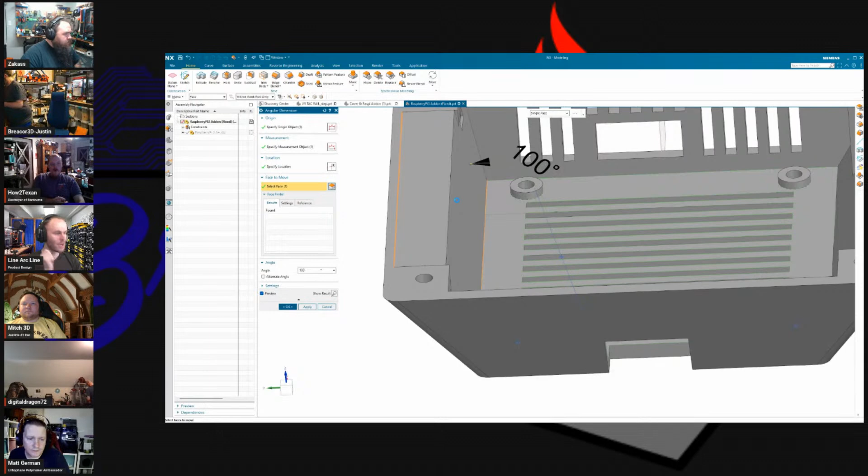I was going to ask which one you hated the most, but I think you just answered that. Yeah, it's a different product. iPad Shapr 3D takes some aspects from good traditional history-based, sketch-based parametric CAD and tries to make it more accessible, but I could neither get used to the lack of being able to go back in my timeline, nor the general interface, which seems moderately unintuitive to me.

Yeah, I can't recommend it in its current state, which is very sad because I want a CAD software for my iPad.

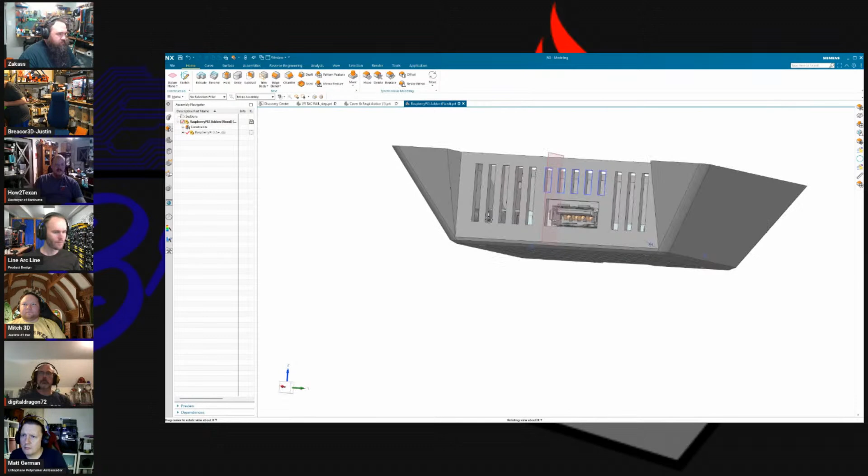But then Onshape comes along. I was about to say that. Yeah, there's a great Onshape app for the iPad. Onshape's about to take the CAD market by storm. I think they have invested.

So there's two that I mentioned. The first one that I didn't like is called Shapr 3D, but it's spelled kind of weird, it's SHAPR I believe. But the second one, the one that I really like, is called Onshape, all one word, ON shape. And it's made by the same folks.

A lot of the original SolidWorks team went to work for Onshape, so you'll see a lot of similarities. But my favorite thing about it, I think I even have it open right now, well regardless, imagine Fusion 360 or SolidWorks, but done beautifully through a web browser interface. Yeah, Onshape is really nice.

I have two things. For my problems with Onshape, the essential problems are that it doesn't let you export as a native file so you can share it anonymously. The way Onshape wants you to share files is through web links, which makes sense.

However, my name is always attached to that web link. I'm not going to talk about why I'm anonymously sharing CAD files, but the second piece is their version control is absolutely beautiful, but you can't delete a branch like a Git branch very easily. You have to copy it. It's weird.

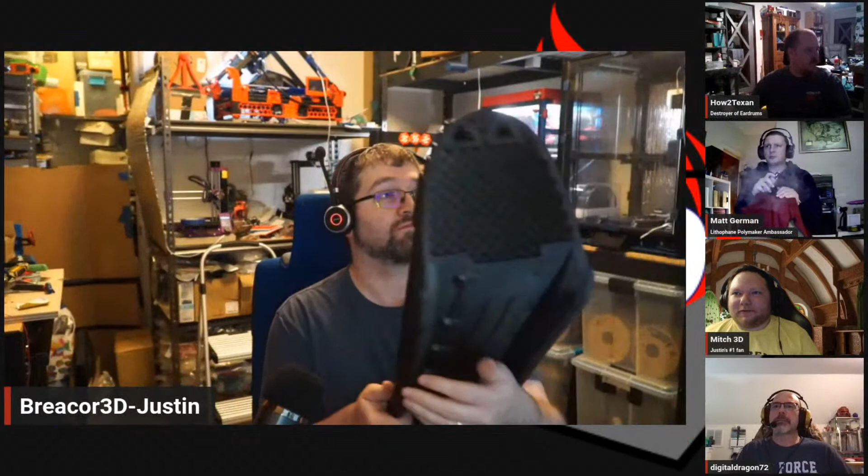That's a tough print for a belt printer. Not really - 8 walls at 0.7 width with infill 15%. He's gonna wrap it. I'm printing it like this because he's gonna wrap this side with padding and fabric, so this side doesn't need to look perfect, but the other side needs to be better. Otherwise I'd have to support the whole bottom end, which would be even harder to remove.

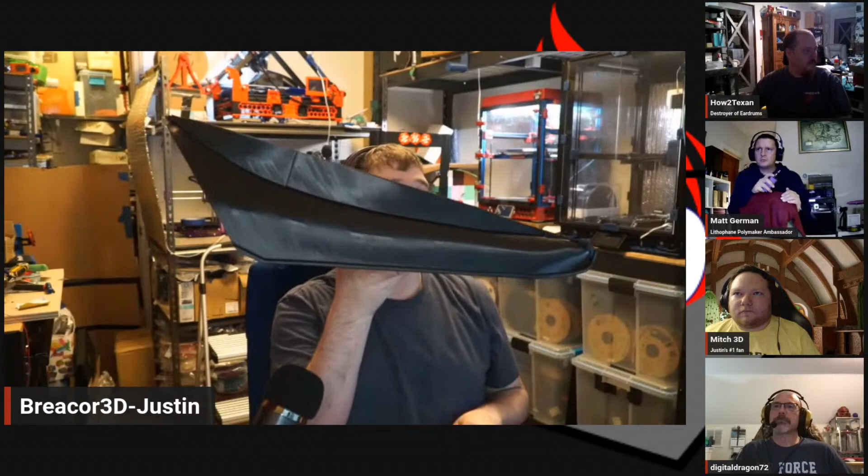It also looks like those grooves go in places. Yeah, they do - he's got a custom motorcycle shop.

I probably took a motorcycle cover for my dad because there's a bunch of old Kawasakis from the 80s that have this side panel oil pan cover, like an oil side cover that's a compound curve. I could probably fiberglass it, but to make the buck I'm probably gonna scan it with my phone to get the general detail and then just remodel it.

But I could probably just print the side covers, and then the problem with that is smoothing - I have to have a more efficient way to smooth prints besides PVB and acetone. But it comes back to me having a 350 millimeter printer that can print big parts that I can actually print in ABS. I'm getting a contract with a government entity that'll be very lucrative.

Oh, that'd be cool. You can't tell us about it though. That's why I said government entity.

What 3D modeling software are you using to scan on your phone? I use Fusion 360 for everything, which does have an app, but the app is kind of convoluted. It's good for reference, but the app is basically - oh, you're talking about scanning, I'm sorry - I'm using Polycam, that's probably the easiest to use and most reliable.

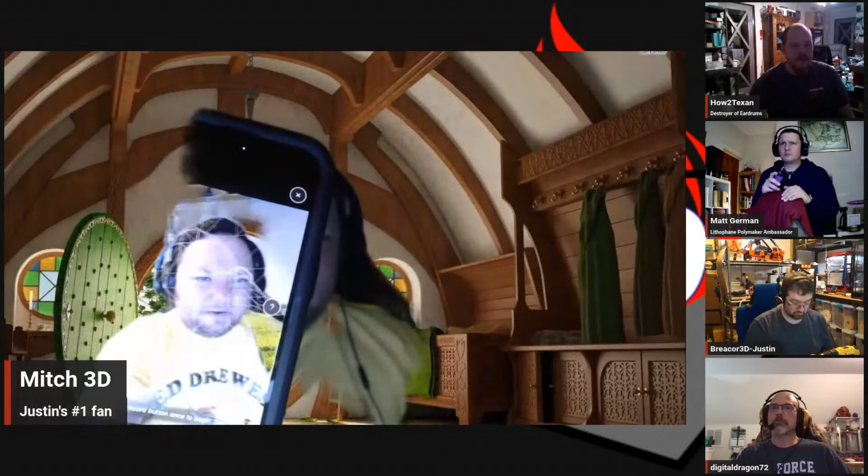But I have used Luma AI, which is not really a good mesh scanner. Polycam is limited unless you pay for it, but I think it's worth it. On the iPhone, it uses the low resolution lidar to get general geometry, so I see how the lidar is picking up my general geometry, and that helps with the photogrammetry. So it's using photogrammetry and lidar combined on the iPhone 14.

Sorry, my background is being removed, but it's surprising that it's actually working this way - it actually does. If you're okay with a low resolution mesh, which is all I really need, I just have to get the general curvature because I'm going to recreate it with critical dimensions. It's not going to be high enough resolution that I'll actually know, so I'm going to have to remodel it anyway.

So in Fusion, to do a compound curve, I think I can just do T-splines in the surface modeling part of Fusion. I think I can do compound curves pretty easily with that, like controlled compound curves that are parametric. I've never done compound curves - I've never done any organic modeling in Fusion, so I'm gonna have to learn that.

But that's how I'm planning to make it, because car parts are really what everybody wants to 3D print, that I've talked to. But they think it's like magic, and it's not. It's so hard to scan car parts because they're all black and featureless, and you gotta paint them, and they're either reflective or you gotta prep them. You gotta have the right lighting, you have to have a high enough resolution scanner.